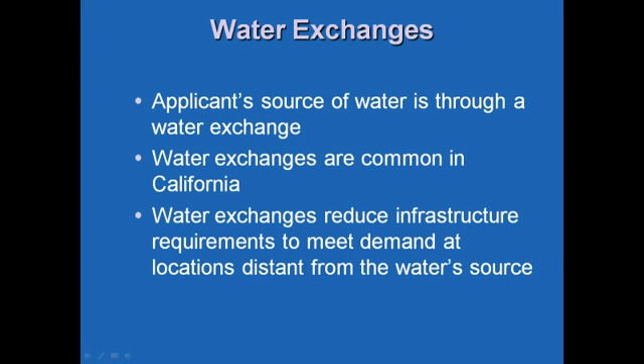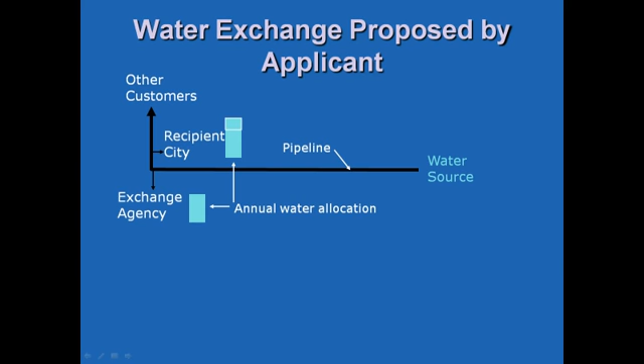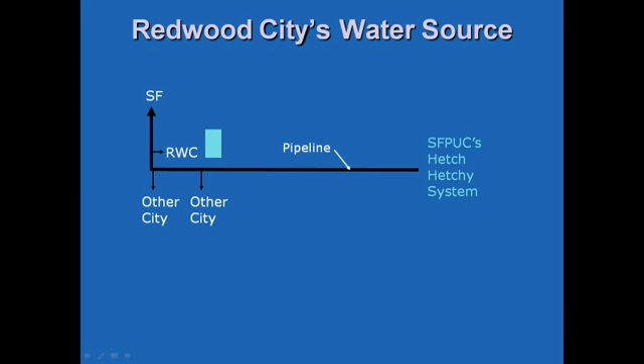The Saltworks project applicant owns rights to water that is deliverable through the State Water Project rather than through the Hetch Hetchy system. Because the two systems are not physically connected, the applicant's water would not be delivered directly to Redwood City. Instead, the applicant's water would be delivered to Redwood City by exchange with Hetch Hetchy system water. The exchange would involve other cities or water agencies that are physically connected to the Hetch Hetchy system and to the State Water Project.

Several such agencies exist. Under the proposed exchange, the applicant's water would be delivered to an exchange agency connected to the State Water Project, and the exchange agency would convey some of its Hetch Hetchy supply to Redwood City. Although water exchanges are common in California, this may be the first long-term exchange involving the Hetch Hetchy system.

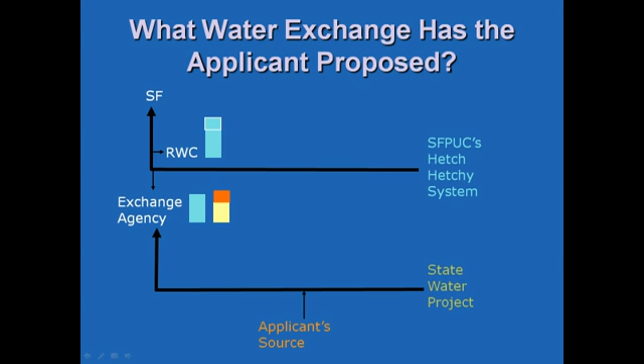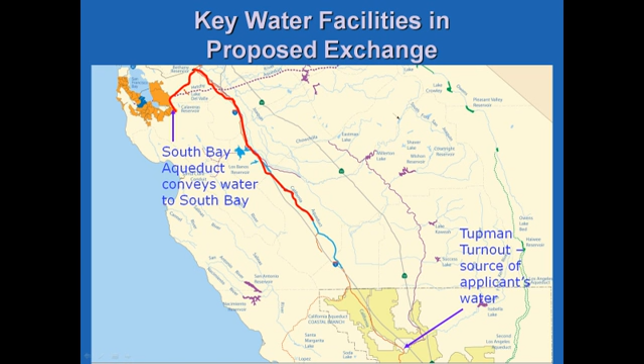This map shows key water facilities in the proposed exchange. The project applicant owns rights to water at the Tupman Turnout on the California Aqueduct in Kern County. The Tupman Turnout is many miles southeast of Redwood City. The State Water Project delivers water from Lake Oroville Reservoir on the Feather River south through the Sacramento-San Joaquin River Delta, where the South Bay Aqueduct delivers State Water Project water to the San Francisco Bay Area, and the California Aqueduct delivers State Water Project water to the San Joaquin Valley, Central Coast, and Southern California.

Meanwhile, the Hetch Hetchy Aqueduct moves water westward to Redwood City and other communities served by that system. The details of the exchange are currently being developed by the applicant, and so the particular participants in any future exchange have not yet been determined.

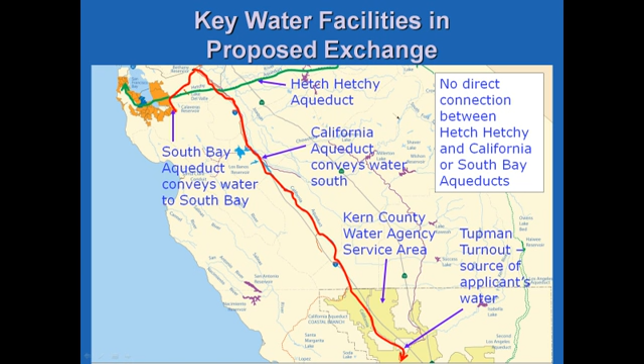Let's look at an example exchange scenario. Since we don't yet know the amount of water to be exchanged, we will use X to represent the quantity of water in the exchange.

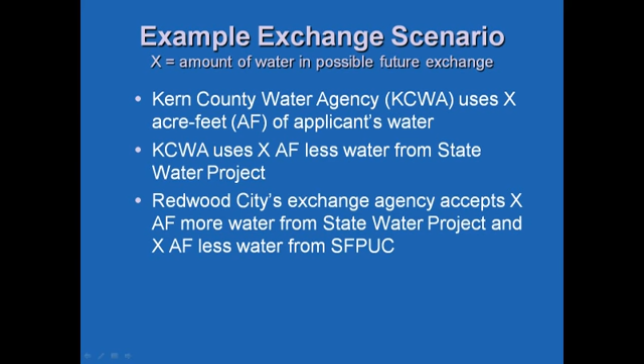In this example exchange scenario, Kern County Water Agency would use X acre-feet of the applicant's water, and it would use X acre-feet less from the State Water Project, while Redwood City's exchange agency accepts X acre-feet more from the State Water Project and X acre-feet less from the San Francisco Public Utilities Commission. Finally, then, Redwood City accepts X acre-feet more from the San Francisco Public Utilities Commission.

The city has retained experts to evaluate the Saltworks project applicant's proposed water exchange, and our review is currently in progress. The city's preliminary review indicates that the water exchange appears feasible, and this was reported to the City Council in February of 2010. The city's experts are currently in the process of evaluating the reliability of the applicant's water source. As the applicant communicates with potential exchange agencies to identify the terms and conditions of a possible future exchange transaction, the city will review those terms and conditions.

The city will not make any commitment to the project applicant or any other entity regarding the water exchange or Saltworks project approval until environmental impacts of the water exchanges have been described in the environmental impact report and it has been certified by the city, and the city is satisfied that the exchange is feasible and reliable.

The Saltworks project applicant owns rights to the water until 2079. The volume of water available to the applicant exceeds the expected demand of the Saltworks project. If the applicant's water rights were not extended beyond 2079, the city would need to use an alternative water source to serve the project. In response to this uncertainty, the city is considering alternative sources of potable water for the Saltworks project and the city in general.

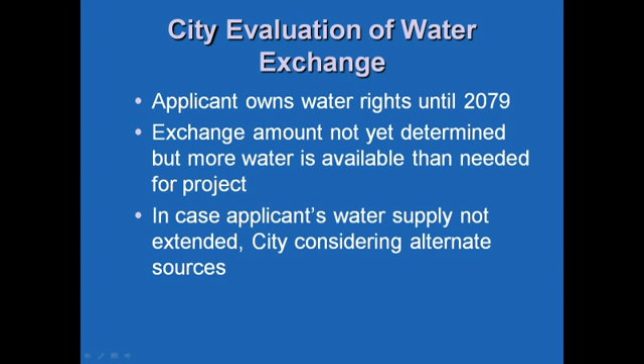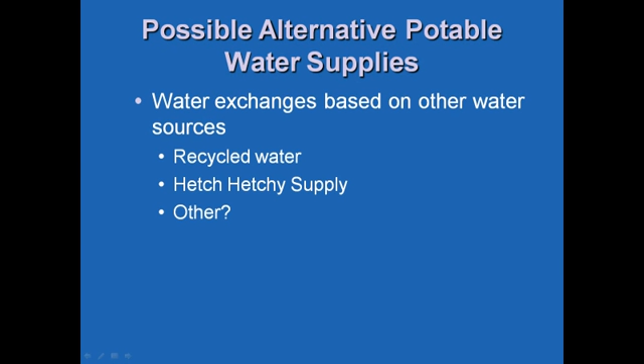Alternative supplies that could be evaluated by the city in the Saltworks project environmental impact report include, in no particular order: water exchanges based on other water sources such as recycled water, Hetch Hetchy supply, or other sources; the city's recycled water; desalination of bay water; and desalination of brackish groundwater.

As part of our scoping process, the city welcomes your input regarding which alternatives should be studied and suggestions for additional alternatives not listed here.